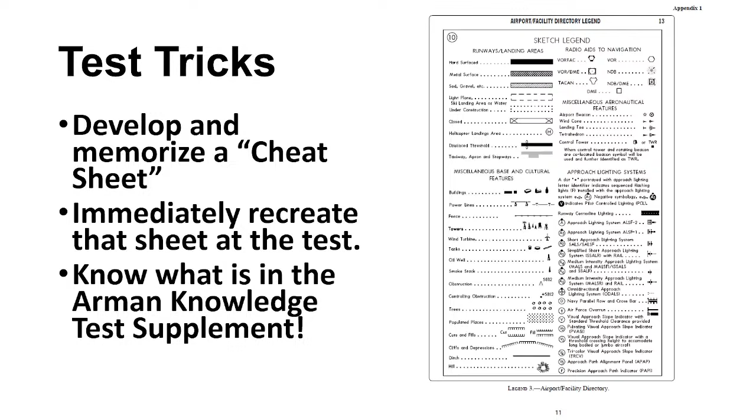In theory, my whole point here in helping you in ground school, I told you my number one goal is getting you through the written test, then getting you through the orals, and then helping you prep for your flight training. So that's what ground school's for. These are test taking techniques that will save you an amazing amount of stress, get you a better score, and make your orals easier because you get a better score.

So, review questions - we gotta do review questions every night. First one, just draw our standard 6-pack plus 2 that we've been using. On this paper? Yep.

So you should at least have something that looks roughly like what I got up there right now. Those of you that have already started labeling, that is coming - working ahead is perfectly fine. The idea is, can you draw it? Can you label the instruments? And then can you do the Rod Machado steps? And finally, can you put what the unit of measure is - not every one of them has a unit of measure, but what the unit of measure is that you get from that device.

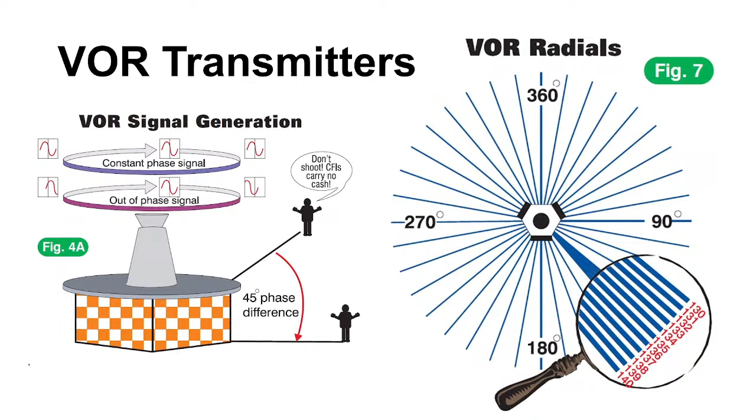Magnetic or true? Magnetic. And there's actually going to be something else that we're going to talk about in here, because I went and did research on something after our little flight.

Alright, so VOR and magnetic azimuth. Oh, look at this slide. Because the magnetic North Pole moves, the VORs have to periodically be updated. Alright? Which is awesome, except they don't all get updated at the same time.

So this specifically is the Ocala, Florida VOR to the Gators VOR. On Victor 441, if you look very, very closely, you are flying on the 355 radial from Ocala, and you're going to come in on the 171 radial to Gators. What is the reciprocal of 171?

351, I actually wrote it up there, right? 351. So in theory it says you went, okay, I'm cruising along, I'm going at 355 degrees, and then I should be going to 351 degrees, but the line doesn't bend. It's straight, because they're updated at different times. Those two VORs are updated at different times. And I literally pulled this off the chart yesterday.

So here's the thing. You are not flying at a magnetic heading of either 355 or 351. You are flying at whatever the magnetic heading is, if you went and drew it on the chart and did all the math today, whatever that is, it's somewhere in that general area, it's going to be close. You are never, ever specifically flying the same magnetic heading as the radial you are on. They're just close, kind of close enough.

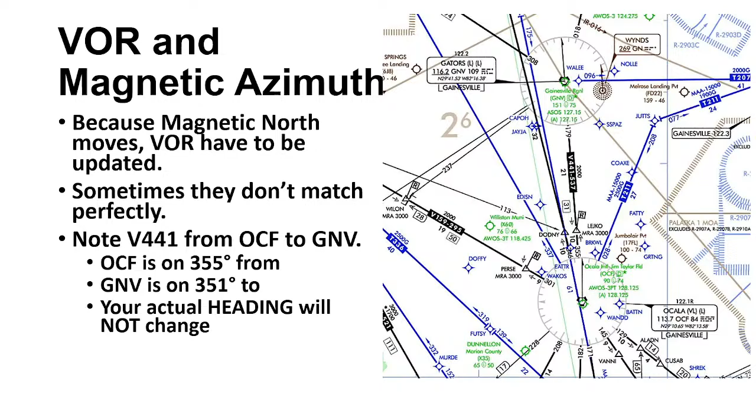And then the Coeur d'Alene one's just right at the field, so if you land on runway 16 and look out your window, you see it as you go by. Okay, so to identify a VOR, to make sure you've got the right one dialed in and you're receiving and that it's working, what do you do?

Listen to Morse code. You have to know Morse code? Because it's written right there. And the Morse code is slow enough that you can just pick it out based off of reading the little dots and dashes. At most, you have to listen for 4 letters.

Do you ever have to listen for 4 letters at a VOR? Yeah. Who said yeah? Why would you have to listen for 4 letters at a VOR? Because you said at most you have to listen for 4 letters. Yeah, I said that, but what I was saying is when you're listening for the Morse code while you're identifying ground-based systems, the most you have to listen for is 4 letters. VOR identifiers are always 3 alpha characters, never numbers, always just 3 letters. So when do you have to listen for a 4th letter?

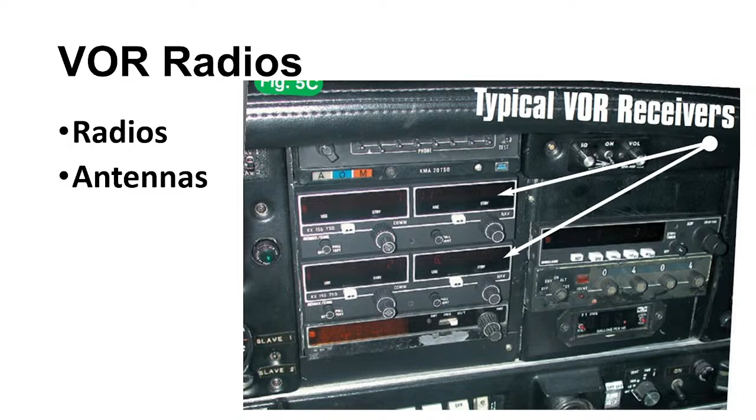This is also a VOR radio, the Garmin 530, the Garmin 430. Now, not all GPS have nav radios built into them, but the typical stack you see with a 430 or a 530, that radio set is actually several radios jammed in there. You've got the GPS receiver, the VOR receiver, the comm receiver, and a glide slope receiver. The glide slope receiver is automatically tuned with the localizer receiver, same knob.

Some DME installations, when you tune in the localizer, automatically tune the DME. Some don't. You may know what DME is? Distance measuring equipment. There we go.

So I throw this up here because people forget that the GPS is also a VOR radio. What changes it from being a VOR, an FM VOR radio, to being a GPS receiver, functionally? It has a GPS antenna and can interpret the signals. No, from an operational perspective.

It's a frequency, right? Not the frequency. There's a CDI button, and when you poke it, it'll either... see where it says GPS above CDI right now? When you poke that button, it'll say LOC, L-O-C, or VLOC. VLOC, VLOC, VLOC. So that's for VOR localizer.

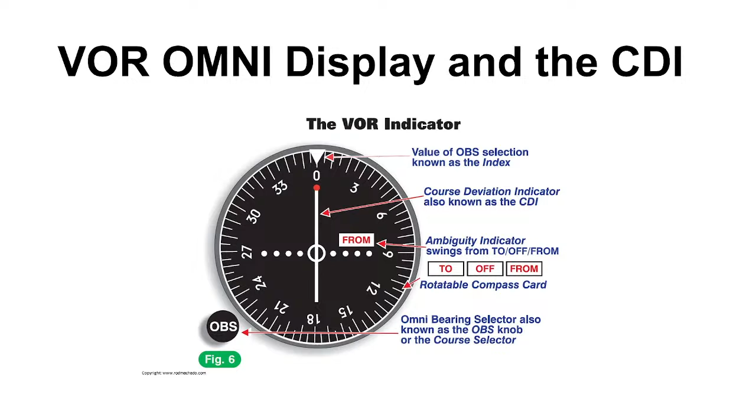I've learned recently that some people refer to that as the donut. The donut represents your aircraft's location in there, and the line of the CDI represents your desired course, if you are in forward sensing mode, if you're in the appropriate mode.

So, navigating with your VOR: VOR needle deflection is how far the little needle is moving—this is VOR speak, or FAA speak. How far you are off course is called your course deviation.

And in GPS, course deviation is also referred to as cross-track error.

Why is it to the left? The airplane is to the left of the course. So the desired course is 360. We are dialed in for the 360 radial from. So we read it at the top. From is at the top.

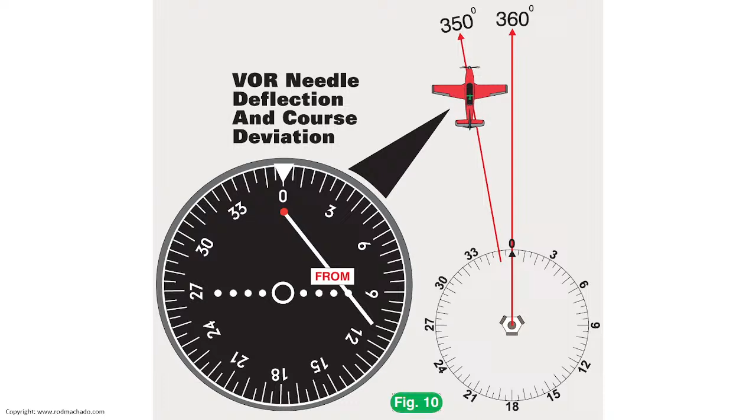So this right here, my dot is to the left, so I am half deflection to the left. If I wanted to get back to the line, what would I do? Fly to the right, I would turn to the right. And as long as you understand that, you're spot on.

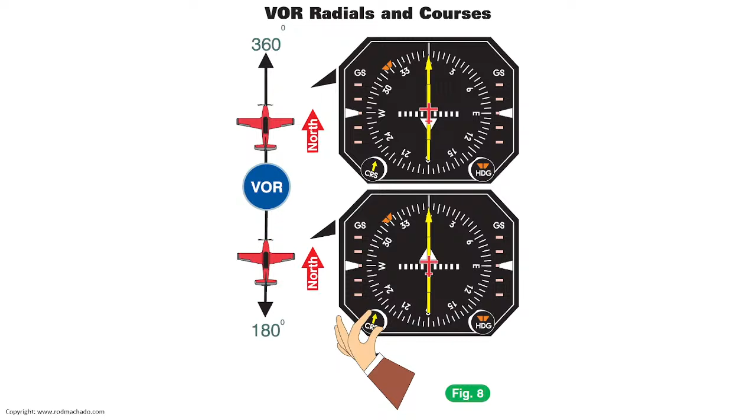180 to, 360 from. In the HSI, the little arrow points away from the radial if you're going the right direction, which, if you were going a weird direction, the HSI would be pointed off to the side. Nicole does have a good trick about that too. I forget what it was. It's okay - if not today, next week we're going to go over tricks and ways to get through the test.

So, selecting your course - remember this, your course is usually the left knob. When you dial that, you are changing the course you are trying to select for the VOR. In EHSIs, if you're on a GPS, that course will automatically change on you if you're cycling. But if you're flying on the VOR, it does not - you have to know it's your job to say, hey, this is the course I want.

It is also a very good idea, once you get established and center your needle and your needle stops drifting, to realize that at some point your course is not going to point the same way that you're actually heading. Heading is which way your plane is pointing. Why would they not line up?

Say it loud - wind! Why are you always whispering, man? I mean, you know I'm just going to tell you to speak up.

Wind. So when you get your wind correction angle set, it's a very good idea to immediately set your heading bug to match your wind correction angle, usually. Use those tools, because then you can see if you're drifting off the intended heading, which is what's keeping you on your desired course, and you can also see if the wind changes dramatically. Because if suddenly you need to change that wind correction, since you're coming off course but holding heading, then you know there's been a change. So use that tool.

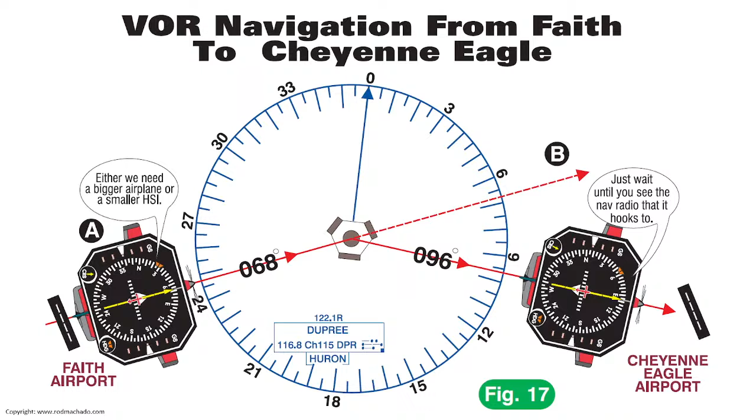I've seen a lot of people that have it right on their panel—they just make a little sticky and stick it up there. There you go. So, dual VOR—what's nice about having two VORs?

Step down fix—what's that? Step down fix, it is a way to identify position. So with a radio, all you know is what direction you are from the VOR. So far, we don't have any tools to tell us where we are on that line. But if you have two VORs...

You can do it with one VOR—it just means a whole lot of tuning and twisting. But you can get on one radio and then look for where that radio crosses the radial from another VOR, and it will tell you exactly where you are in space, because two radials only cross in one place. It's like longitude and latitude, but based off of VOR.

So does anybody have a difficult time with this concept? This is one of those that if you don't get it, it really hurts your brain, but most people kind of get it intuitively—if I know what line I'm on from this radio, and what line I'm on from this one, I know where my intersection is. Two lines make a point.

So it's just a question: instrument procedures that need step down fixes never actually require two VOR radios, right? No, because you can do it with one, but you do want to switch back and forth a lot—it's just a lot of work. It's an incredible amount of work, and you really have to be good at tuning. Now usually you can put them in flip-flop, but then it's setting the OBS, and you better be on the right OBS, you know.

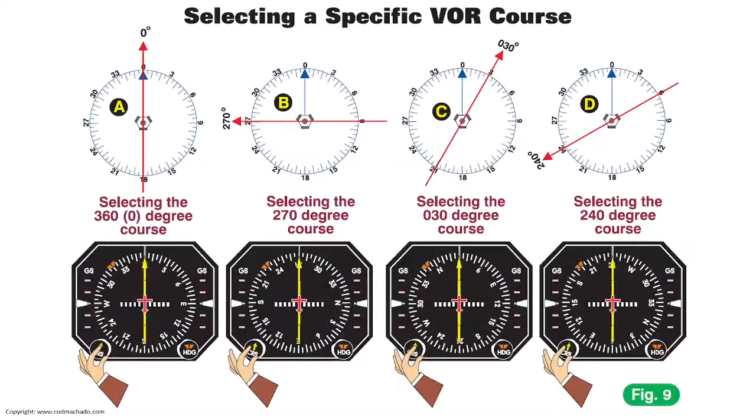I think at 60 miles, 1 degree is 1 mile. So 1 dot is 2 degrees, which makes 1 dot equal 2 miles. So at 60 miles, for every dot, you are 2 miles off course. How wide is a VOR Victor Airway? 4 miles total, I think. So at 1 dot of deflection at 60 miles, you are almost off the airway.

I'm going to double check that, because it might actually be 4 miles each side. Let me check it. Alright, everyone pull out Google. Well, that's what we're here for, to support each other.

But the bottom line is 60 miles, 2 dots. I don't always trust my memory, even though I just researched this. I went back to check my notes: 1 dot is 2 degrees, is 2 miles. It's 1 degree at 1 mile for every degree at 60 nautical miles. So a Victor Airway is 4 nautical miles on either side of the center line, which is 8 nautical miles total. And at 2 dots of deflection, if you're fully deflected, you're off the course at 60 miles.

Aerobatics are prohibited within 4 nautical miles of a Victor Airway, right? Isn't that one of the restrictions on aerobatics? I believe it's measured from the center line, so it's 4 miles from the center line of the Victor Airway, which makes it 8 miles wide total. Yes, that's why I said I was wrong, we were clarifying coming back.

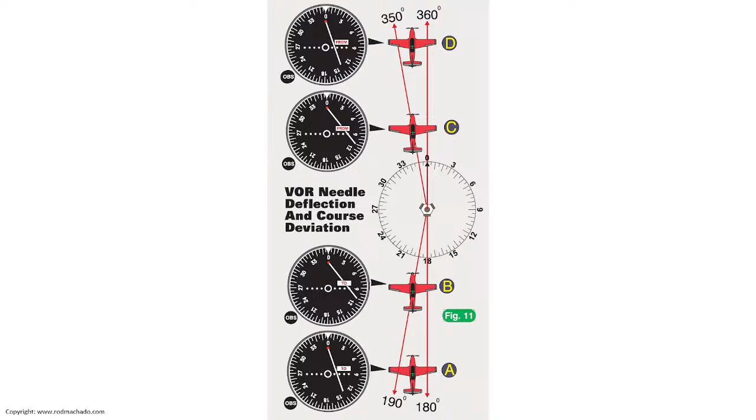I am slightly right of course, get back on course. So if you're less than 120 miles away and less than 2 dots, you know you're in the safe zone. Hypothetically, you should be inside that safe zone if you're less than 120 miles and less than 2 dots. Except your VOR is not going to be receivable at 120 miles actually. So let's not overcomplicate it. The real thing is, if you're deflected, get back on course. Center your needle. Alright, get back to where we were.

So, chasing the needle. I had an image I meant to throw in here and I forgot to do it, about the zone of the cone of confusion we talked about. What's the zone of ambiguity? Does anybody know? Isn't that right over the top, where it doesn't come to or from?

So it's if you don't cross directly over the VOR, right over the top, that's the cone of confusion. It's a cone that goes from the ground up, perpendicular to your radio. So this is my VOR. Where's the cone of confusion? Your cone of confusion looks something like this from the top, centered here.

Now, if I'm supposed to be flying to the VOR but for some reason I fly over here, your course is still down through the middle. You're still going to get that. Bottom line is you are way past full deflection at this point, but right here, your CDI needle doesn't know which way you are past. It knows you are at full deflection, so it may windshield-wiper on you, sometimes pegging to one side and then flipping to the other side. Sometimes your to-from indicator will go into a flag mode for a second or two, it winks out at you for a minute.

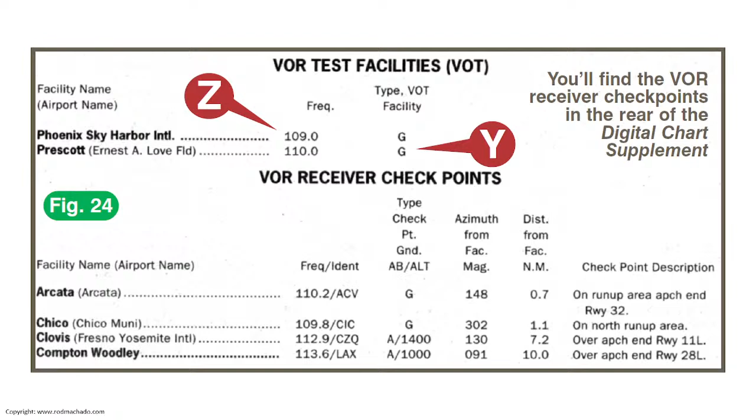So those are ground VOTs. I have never seen an airborne VOT, but now you've got me curious. Somebody mentioned it's plus or minus 6 if you're in the air. I'd have to look, I don't think it is, but it shouldn't be, because the VOT only emits one radial. It doesn't matter where you are from it, it only emits one radial. So if you're airborne, why would it have more than that? I don't know, I'll have to look it up.

And I'm not, we're kind of going behind, so I'm going to speed up. DME. You will likely never see an airplane with a functioning DME anymore. They're out there, they're pretty rare now.

What does DME actually measure? The distance from it to the plane, which is the straight line slant range. And that's what's important. Why is it important that it's slant range? Because of the Pythagoreans. Because of the Pythagoreans? Yeah, excellent answer, very good.

There's not snakes. Because for every 6,000 feet you're up in the air, when you go to the top of it, that's a mile away when you're straight up. So at a distance, it's pretty accurate. As you get closer, the error increases for what your actual distance is from that.

The thing to bear in mind is all of those elongated D's that you see, how they show slant DME distance - an elongated D with a number written inside it. Those distances are the actual slant range distance, and not the distance across the ground. This becomes a problem if you try to compare them using GPS distances or distances that you measure on a chart, because again, your altitude affects it.

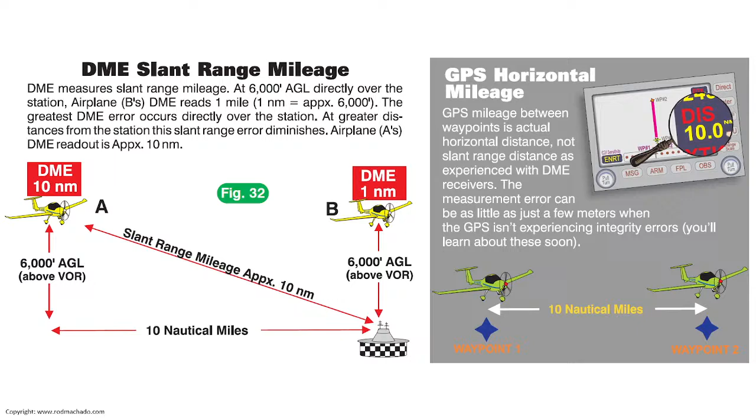Slant range, it's the hypotenuse. It is not the 10 nautical miles on the bottom. Slant range distance is going to be 10 point something miles. Weird exception to that: when you're flying a DME arc and using GPS in lieu of the DME, it's actually measuring the straight line distance to where the DME would be. You're still within the protected zone.

All right, 3 different ways of determining a position with DME equipment. You will never ever do this, but it's just a curious thing coming back to your head. You can be on the line and measure DME distance, and that gives you a specific spot. I am on the 360 radial, 200 miles away.

You can use one DME and a different VOR, and where that DME line crosses is a specific point in space. I have never, ever seen somebody use that as a useful means of measurement. I'm not saying it's not possible, I'm saying it's a pain because you actually have to tune your DME to a different radio than your VOR is tuned to. And then the last one is, if you have 2 DMEs, or you can switch real fast, there are 2 points in space that are the same distance from both DMEs.

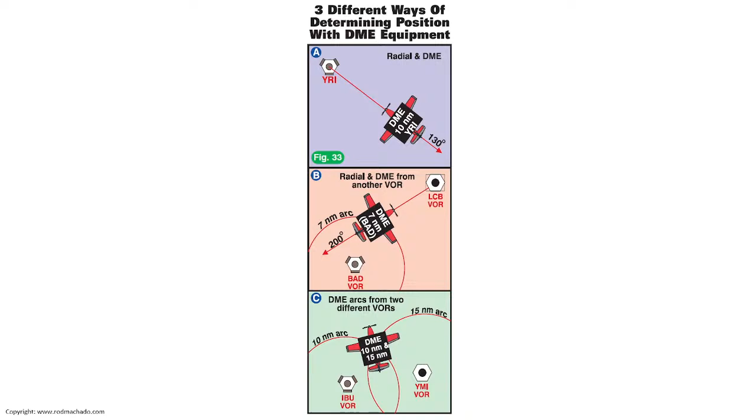This is more trivia than anything else. I've used method A quite a bit - going from the same VOR DME and getting a radial and a distance, super useful, very helpful. My airplane has a working DME still, I love it, I keep killing it now that I named it George. But for B or C, you have to know close enough to where you are to figure out which of those 2 points it might be. So if you're really lost, it's not going to help you.

So, DME arc. You will fly a DME arc at some point in your training, it's just the way it is. Your instructor is going to explain it to you a lot because it's one of those things that's like trying to explain to somebody how to play a piano for the first time. Except it takes a lot less effort to actually make it work. And then once you figure it out, it's kind of like riding a bicycle.

You're going to learn this whole thing about turn 10, twist 10. I don't use turn 10, twist 10, I use half deflection, half deflection. You twist the OBS until you have half a deflection. Then you fly, you cross through, you let it go to half a deflection, and you turn it until you got a half a deflection again, which is turn 10, twist 10. It's just a variant.

This is what a DME arc looks like on a chart. We haven't taught charts yet. But the bottom line is your course is a big curve, and it helps keep you from having to do weird turns and weird things to get on line. All right, turn 10, twist 10, DME arcs made easy.

I have not done... Hi, it's Dan with Flight Insight, and we're looking at the DME arc here. I don't know if we're going to get audio on this.

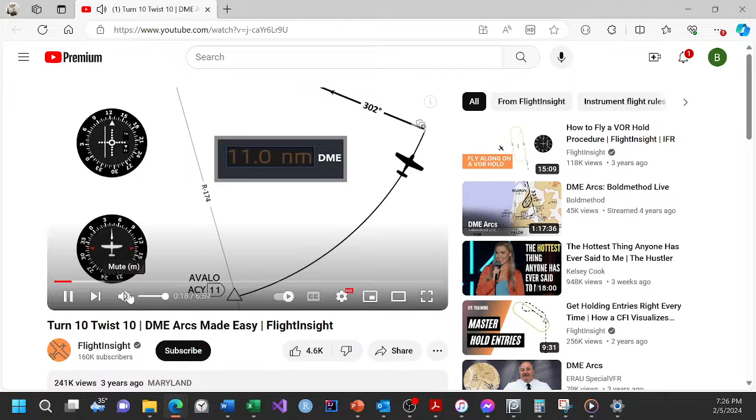How many G's was that?

More than you'd like to know. One to enter and one to leave the arc, then a series of small 10-degree turns to stay on the arc at a constant distance from the station. Okay, this is not going to work.

Let's look at the VOR approach to runway 31 in Atlantic City. You see the two arcs to the north and south of the approach course, and the big note saying DME is required. Let's focus on the southern arc, which takes us just along the coastline, clear of all those casino high-rises on the boardwalk.

As always, we'll rebuild this approach on our whiteboard, starting with the VOR station itself, located right on the field, and then move the procedure over to the left for now.

We can get set up for the arc by flying outbound from the station on the 174 radial. The DME arc starts 11 nautical miles from the station at a point identified as Avalo. It's noted by the triangle and the number 11, inside that elongated D for DME.

From Avalo, we'll arc to the north and east, staying 11 miles away from the Atlantic City VOR the whole time, until we reach the inbound course for the approach of 302 heading. Just note this isn't the 302 radial, but the reciprocal of that — it's the 122 radial. In any case, we're flying the 302 heading that will align us with runway 31.

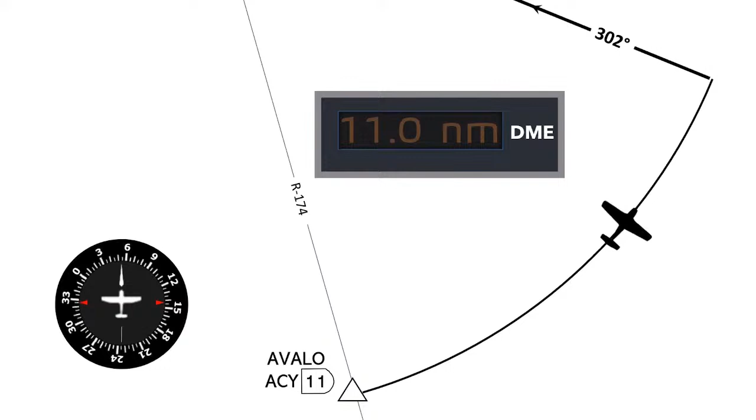Let's get a closer look at the arc. From the time we depart Avalo, we'll be making heading changes to the left in order to stay 11 miles from the station. Our DME receiver, or the distance measured on your GPS, will help confirm that we're staying on the arc. It's all too easy to veer away from the arc by, for example, not turning enough so the aircraft drifts further away from the station as the DME shows.

So we need some way to tell us when to turn. This is where the VOR receiver comes in. We can identify a series of radials from the station that will tell us exactly where we are on the arc. So just like Avalo is on the 174 radial, we can mark other positions on, say, every 10th radial from there — like the 164, 154, 144 radial, and so on.

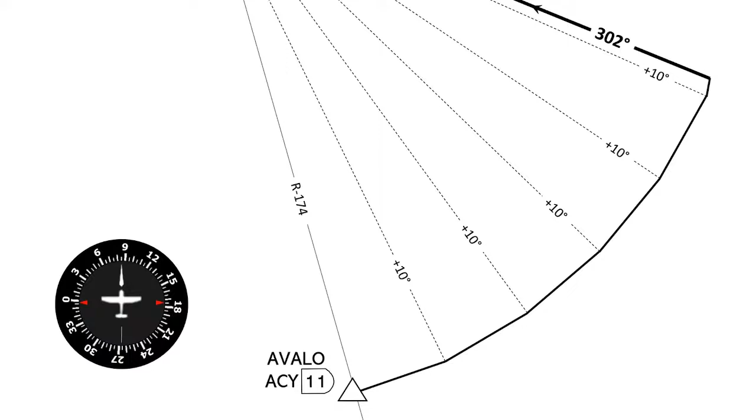Then instead of thinking of the arc as one continuous left turn, we can split it up into segments, each with a 10-degree turn at a time, starting at the radials we identified. So we turn the arc from a perfect circle into a portion of a sort of 36-sided polygon.

Now we'll get set up by intercepting the 174 radial outbound. We've got 174 selected on the VOR and are flying an intercept heading of about 145 degrees. When the needle centers, we'll turn to the outbound course of 174, and we know we're approaching Avalo when the DME gets closer to 11.

From Avalo, we'll make a 90-degree turn to start the arc. The arc starts and ends with 90-degree turns, but you don't have to do the math. Pilots should never do hard math — even smart pilots lose about 30 IQ points in the cockpit. Just too much going on.

To figure out what a 90-degree left turn is, just look at the left red arrow on the heading indicator, which would be 84 degrees, and fly that.

Now we're ready to start flying the arc, but we want to know when it's time for the next left turn. We'll want to turn again when we cross the next radial 10 degrees away, so we'll twist 10 degrees in the VOR, sending the needle to the left. Which way do we twist? Well, we're arcing with turns to the left, so the numbers decrease, just like in any left turn. If we were arcing right, we'd increase the radials.

Now we'll fly our heading until we cross that next radial as indicated by the needle coming to the center. When that happens, we'll turn 10 degrees left and twist 10 degrees left, continuing to fly on that new heading. Once the needle centers again, it's another round of turn 10, twist 10, and flying the next segment.

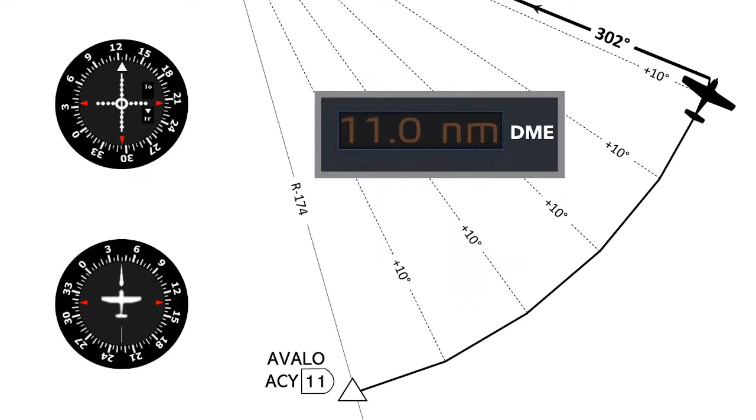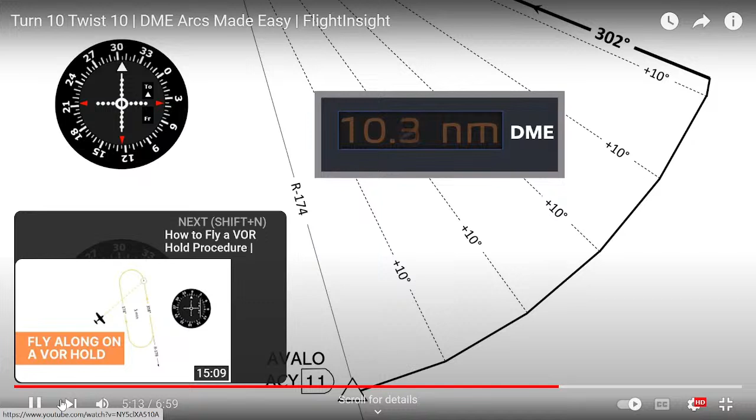Remember, our inbound course is 302, so we'll want to enter the approach segment when 302 is on the bottom of the VOR receiver. Again, it's not the 302 radial we're flying, it's its reciprocal. Now it's time for the second 90-degree turn to exit the arc and enter the final approach course. We'll turn inbound and then twist the VOR so the inbound course is now on top. Notice the flag flips from FROM to TO, and from there we fly inbound like we would on any VOR approach, noticing the DME distance getting smaller as we approach.

That was better than me trying to explain that. Some pretty good visual aids. Yeah, like that one. All right.

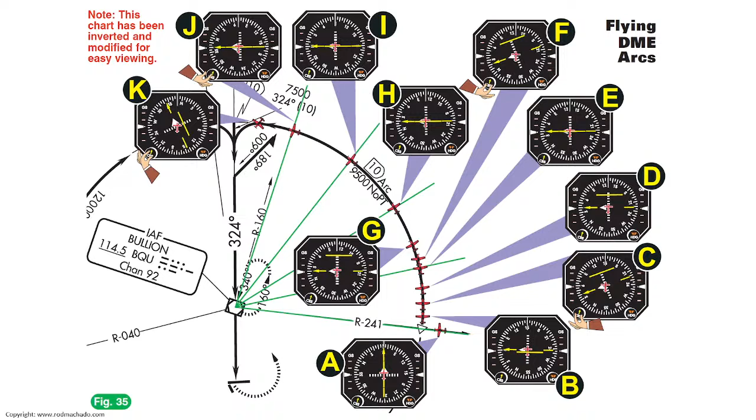Alright, I throw this up here because this is the picture from the book. The YouTube video was much easier to understand. Flying a DME arc is harder to explain than it is to do, but doing it takes practice. It took me like 20 minutes staring at this, and finally I drew it out before I actually figured it out. There you go. Okay.

So, using the RMI. Again, it's another one of those - you're not going to see an RMI, but you might see a question about an RMI. The RMI needle just points to the station all the time, kind of like an NDB. So you have to do this weird convoluted math if you want to figure out actual courses and reciprocals, which is hard. But for flying the arc, as long as you keep the same DME and you keep the RMI needle pointing to the proper side of the plane - if you're doing the left arc, it points off to the left wing - you just keep it pointing at the left wing and periodically make a little 5 or 10 degree turn, and it will stay off to the left wing. Just make sure if you're getting further out, you turn closer towards it. If you're getting closer to the DME, you make a shallower turn, or you just stay straight for a little while. You'll catch back up to the arc.

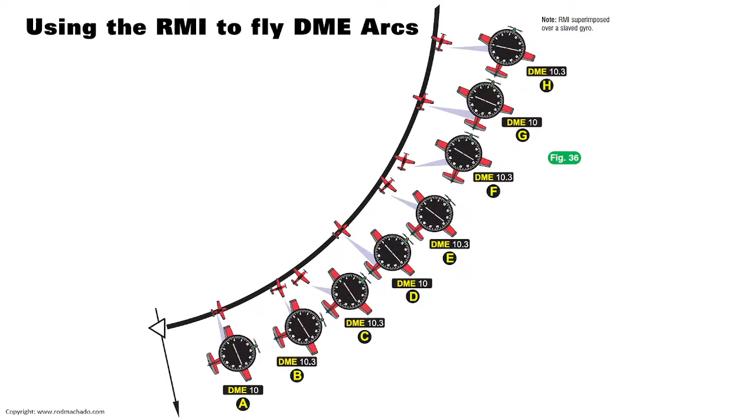VOR and the ILS. Yeah, ended up way longer than I was expecting. All right, VOR and the ILS. Same radio. Localizer is usually located on the field, and is usually aligned with the runway. Localizer only has one true radial with an associated back course. The ILS also has a glide slope, which is basically a radial turned 90 degrees on its edge. Okay?

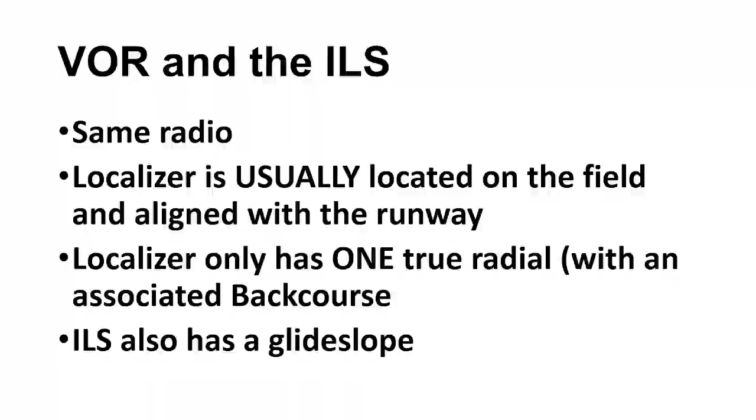Localizer compared to a VOR, you've got - there's your 20 degree VOR course width, 10 degrees left or right. Okay, but elsewhere it actually says it's only 10 degrees, so I will double check why I have two different widths. This is out of the book, so stick with 20. I have never been asked that as a test question, just so you know. I don't plan on being asked it as a test question. It's more thinking for navigation, if I'm doing something stupid like trying to use two VORs to triangulate my position.

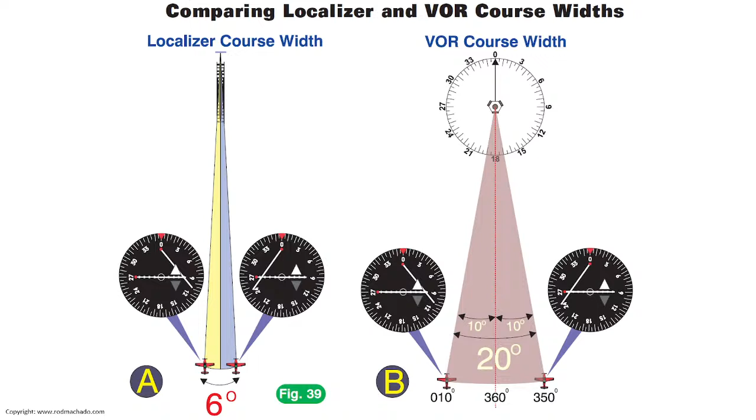Hopefully what you're getting is the center of the VOR. Okay, so a normal localizer is 6 degrees wide. Some are only 3 degrees wide. Depends on how wide the runway is and where the localizer is placed, because the goal is to make it so that when you cross the threshold, there's a certain width - it's 700 and some feet. I think it's just 700. Is it just 700? I think that's what it says in here. Okay, see, you guys remember better than I do.

Notice, this picture with all kinds of information is on page 47 of the knowledge testing supplement. Yep, 700 feet. Long runway, 3 degrees. Short runway, 6 degrees. Also that you end up with 700 feet in width.

All right, the back course is going to be reverse sensing. Sometimes they have approaches that use the back course. If you're on a back course approach, the glide slope is void - do not pay attention to a glide slope on a back course. So why would we use a back course?

Because the wind is going the wrong way for you, and it allows you a straight-in landing.

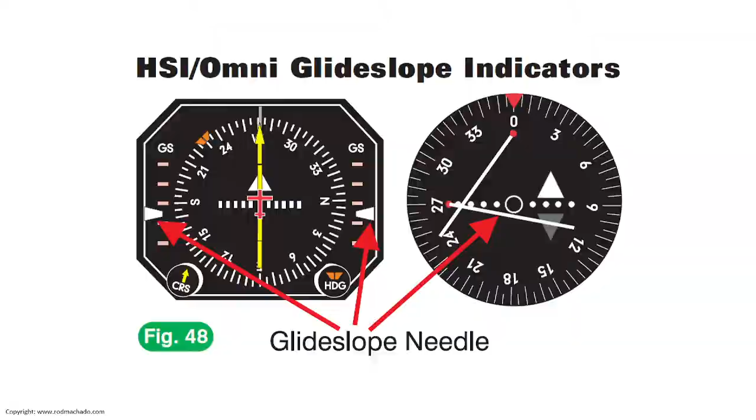So if you're on a back course, will that glide slope still be there? It shouldn't, but sometimes they will show up. If you are on a back course, you are guaranteed that glide slope is a false glide slope. It'll only show up on a back course through weird reflection or some sort of building in the way. Craziness.

All right, glide slope indicators. The glide slope, if it's above your little donut, you're below the glide slope. So you should hold your altitude and wait till you come into it, and that is the proper way to intercept a glide slope. You should always come into a glide slope from the bottom. Why do we not come in from the top? Anybody know? Because you're descending very quickly if you get it that way.

So if you are too high on the glide slope, there's a true glide slope, and then there's like some ambiguity space, and then there'll be a false glide slope that'll be much steeper than the proper glide slope. It has to do with harmonic resonances and wavelength interference and math, but you can have up to two or three false glide slopes depending on the installation. The trick is the bottom one is the right one, and if you come into it from the bottom, you'll get the one that comes in at the lowest angle. That's the one that's been surveyed. Otherwise, what you end up with is too fast a descent rate, too steep an angle.

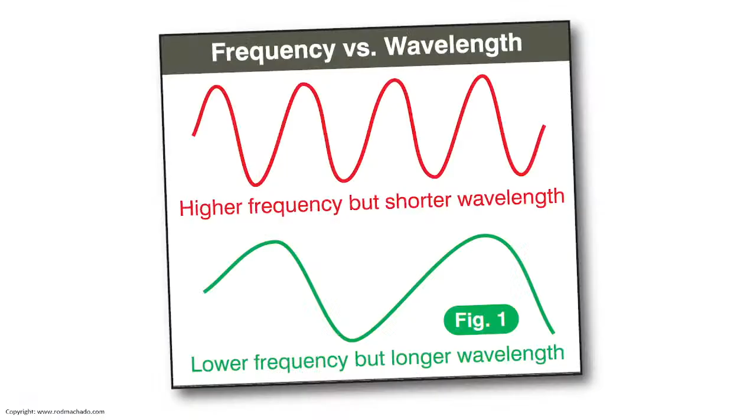Here's a question for you. What do you do if you're somewhere, say that you've got to go missed approach, quite a ways out, and you accidentally get on that higher false glide slope? You realize you're on it, but you're already past your missed approach threshold. What do you do? You go missed. You're gonna do a missed approach and go around. But even if you're already past where you can do a missed approach, you're still over the airport. You will go missed. If you are not on the proper glide slope, you go missed.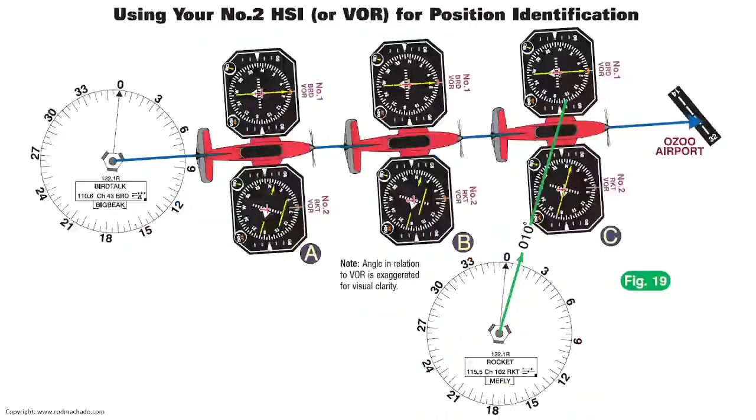Oh yes, technology. It's beautiful.

Glide slope: outer marker, middle marker. There's technically an inner marker too, but you'll never deal with it. They're just little radios that broadcast straight up, making a little oval shape that tells you where you are on the glide slope. You'll only see them on an ILS, instrument landing system.

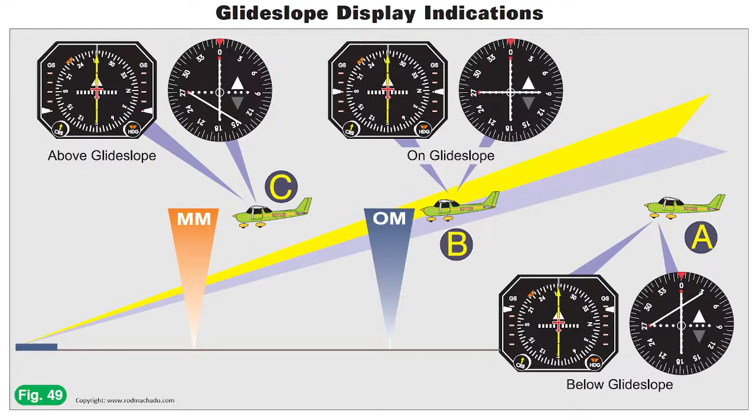Your glide slope transmitter is usually just off to the side of the runway, partway down it. Big thing to note: the glide path brings you down to the 1,000 foot markers - that's where it's trying to put you down, not at the end of the runway.

Your touchdown zone is in the first 3,000 feet of a runway. The touchdown zone identifier is the big 1,000 foot markers - I call them the refrigerators. You land on the refrigerators. That is the proper way to come down.

Your antennas are typically on the back of your tail, oftentimes looking like gigantic cat whiskers. It's not necessarily true that your glide slope antenna is in that same array, because the glide slope antennas are super short, while your VOR antennas are longer.

Those radios you were talking about - what does that look like in the cockpit when you go over one? The marker radio lights up.

They're very often 3 little colored lights built into your commo panel. You find weird places that there's just a radio built in. If you've got 3 little lights - a blue one, an orange one, and a white one - that's OMI: outer, middle, inner. There will also often be a little marker switch for low and high setting.

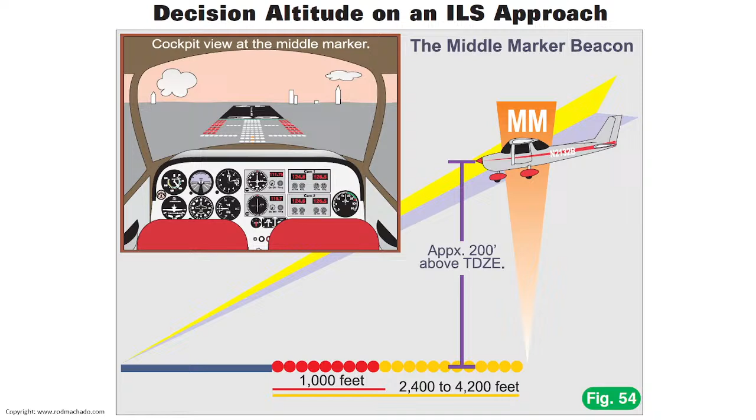The outer marker beacon is 4 to 7 miles out. It's not nearly as precise. It will always be on the glide slope and will be indicated on the approach chart. Nowadays it usually also has a co-located GPS fix. It's not technically a step down fix since you're flying on a glide slope, but it is just a reference to where you are.

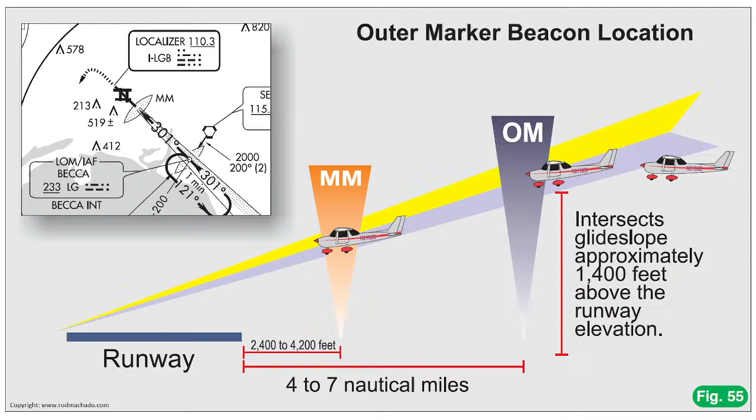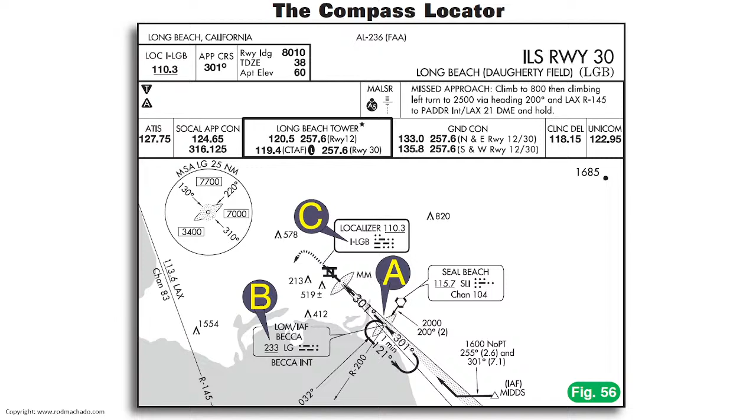And compass locator - a compass locator is a marker beacon that also acts as an NDB. They're being phased out, but there may be a test question asking what a compass locator is: a marker beacon that also functions as a non-directional beacon.

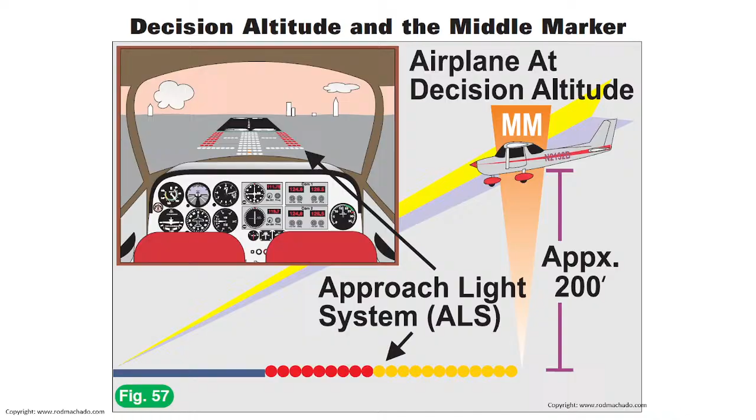Inside the middle marker - decision altitude. Approach lighting systems: for tonight, all you need to know is there's a bunch of different lighting systems and they look different. There are little pictures that depict what they should look like, and those end up on your approach plate. This was in this chapter, so I threw it on here now. We'll talk about it more when we discuss approach plates.

You want to know what kind of lights you expect to see. You also need to know that when you reach your decision altitude or MDA, you have to see something on the runway side of the lights, in addition to the lead-in lights, to continue your approach beyond 100 feet AGL. That's kind of a big thing - you're doing it within 100 feet of the runway without being able to see the runway.

You can only go down to MDA or DA, and then if you see the light out here, you can continue down to 100 feet. Your MDA might be 600 feet, it might be 400 feet. Very often on an ILS, it's 200 feet.

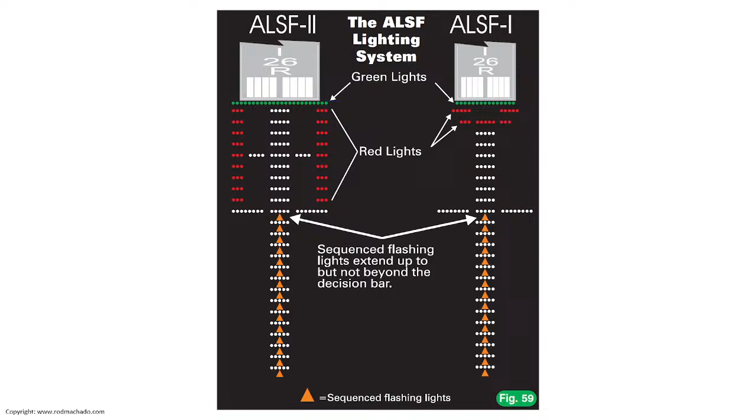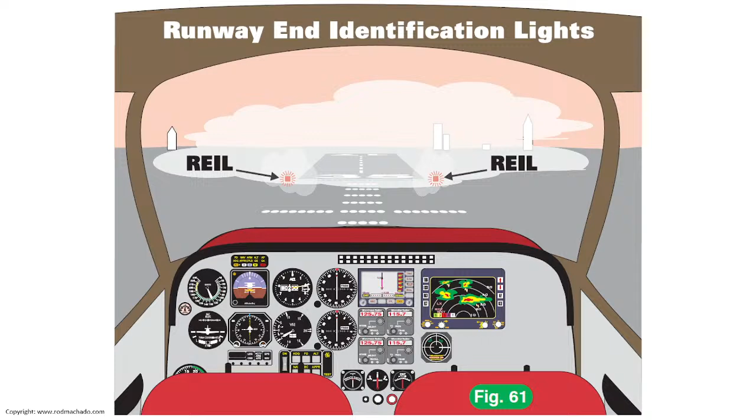ODALs are very, very simple lights. They're all white, but they flash in sequence.

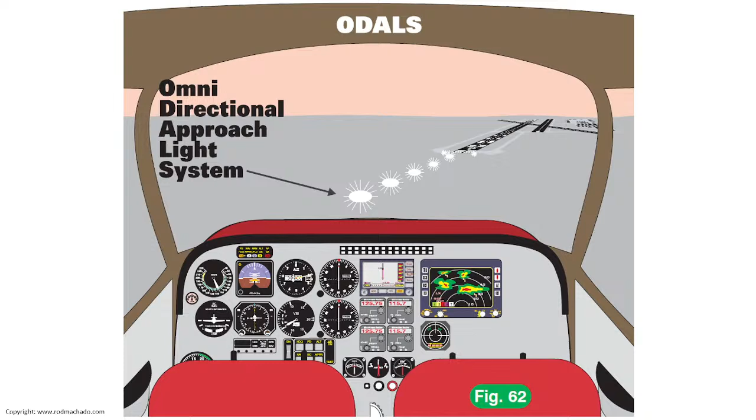So this is a little bit of potpourri at the end here. Simplified directional facility may or may not be aligned with the runway, maybe 6 or 12, and it has a 3-letter identifier, will not have an I. An SDF, those are all being phased out. You could stumble across one for a little while longer. It's like a localizer, but not as narrow necessarily. It's very often not exactly aligned with the runway, because there are obstacles or other things that cause a problem with using a regular localizer. So it's a workaround. They usually have much higher approach minimums than localizers.

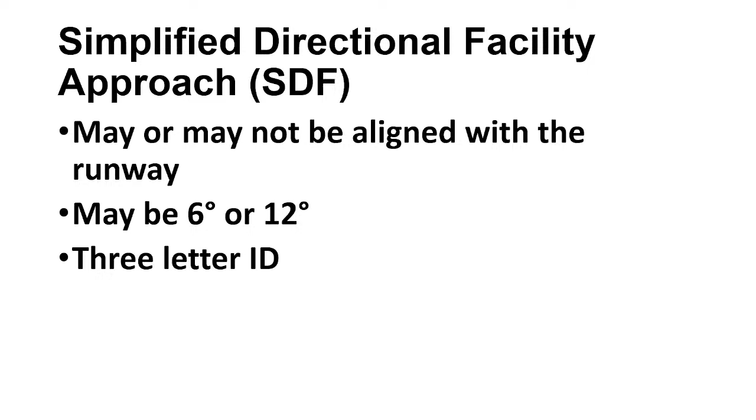Again, said obstacles. Because you have obstacles in the way. And it ends up with, oftentimes you'll have a weird descent that's a little steeper than normal. This SDF is 6 or 12 normally, so like I said, they can be 6 degrees just like a localizer. But if they are 6 degrees, they're probably not aligned with the runway.

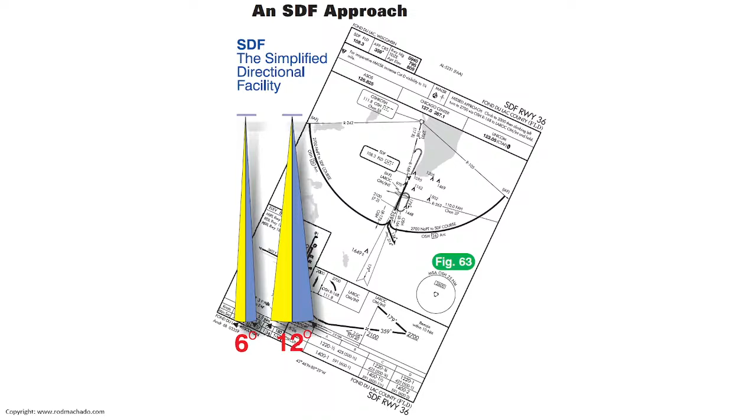Then there's localizer type directional aid. This is when you use somebody else's localizer to do business at your airport. So if you've got 2 airports that are pretty close together, one of them has a localizer, the other airport may just not buy one, and they'll use that signal. It's important to know you're coming down on an LDA, because if you keep following that thing, you're going to end up at the wrong airport, not just the wrong place. LDAs are almost always circling only minimums, but not always. If the localizer happens to go down the runway and is within 30 degrees, they can use it for straight in minimums.

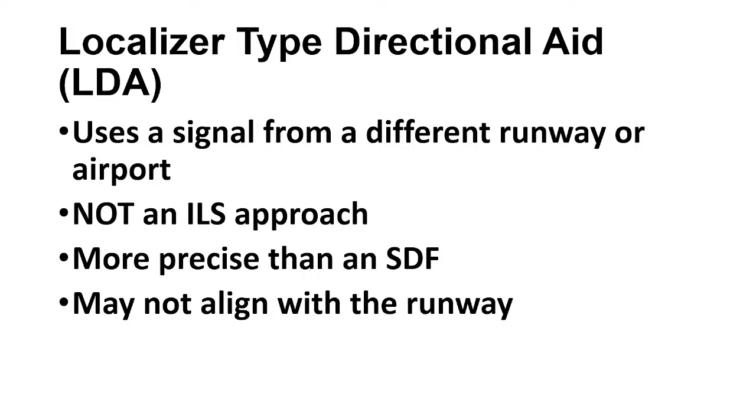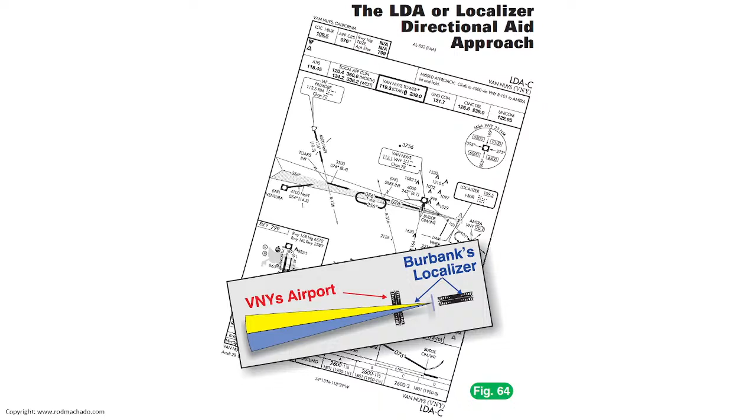Burbank, and then Van Nuys has a runway. So if you think about this, at Van Nuys, you come in flying down Burbank's localizer, and then you're going to have to circle either left or right to land. If you kept going straight, you'd be landing at Burbank, and they might be upset with you because you're not supposed to be there.

There you go. All right, area navigation, I want to hit this piece real quick. There is a form of RNAV that was based off of VORs, called VOR DME. Remember how you can calculate your exact position in space from the radial and distance from the VOR? They made a box, a computer in your plane, where you could say I want to fly to a point on this radial, this far from this VOR, and it would make that point and treat it like a fake VOR. I bring this up because I think there was one question on the test about it.

But what's important is that you understand RNAV does not equal GPS. GPS is one subset of RNAV. It's also called GNSS, and I knew what that stood for 2 minutes ago and now I forgot. Global Navigation Satellite System, thank you very much. So GPS operates on the GNSS. GPS is one form of RNAV.

There used to be a form called LORAN, which was super complicated because it used radios that sent out ellipses, egg-shaped, with complex calculations. But VOR DME navigation is still performed by certain airlines and military organizations, specifically above 24,000 feet. Which is why on the grab card, the second D is DME or GPS, because above 24,000 feet you're required to have one or the other, no options. You have to have DME or GPS above 24,000 feet.

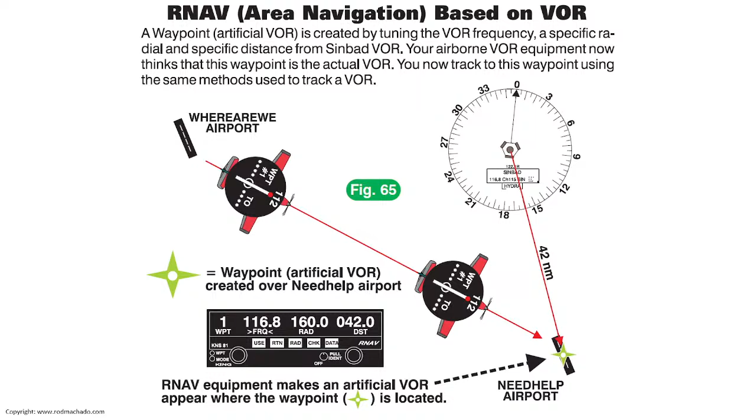All right, so again, it's like you make up a fake VOR and then they fly to and from the VOR just like a VOR.

GPS has 3 segments, and I'm only going to do part of this tonight, I've got time next week for it. So GPS has 3 segments: space, control, and user. Space is all the stuff that's up in space. Control are ground elements that support the space-based elements. And then user is you and your radio.

One thing to bear in mind is that you are receive only. You don't do any broadcasting in the GPS world.

Calculations are based on time and trilateration, which is literally they measure how far you are from multiple satellites, and then that calculates the interceptions of all those spheres, and where they all come together is where you are. The more satellites you can see, the more accurate this process is. It takes a minimum of 4.

The book says there are 32 operational satellites. According to the GPS satellite website, there's only 31 operational right now. But only 24 are required. A minimum of 4 are visible for 3D navigation. Typically we actually use 5. You can only use 4 if you have barometrically adjusted altitude, which is what we have in our airplanes. But typically you're getting 5. Extra satellites improve performance, more than 24 are usually running at any given time.

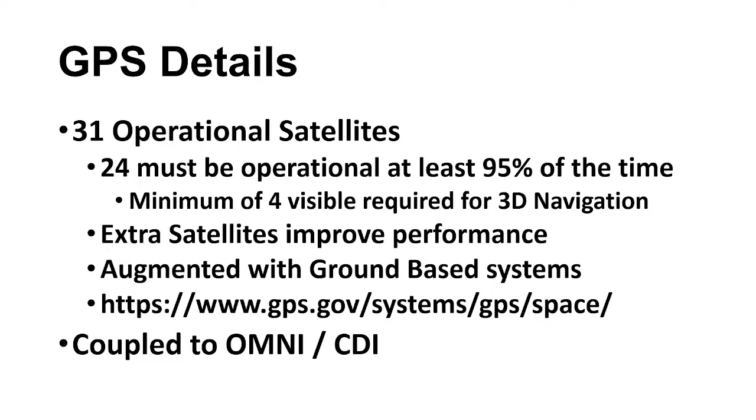Bottom line, at least 24 satellites flying in, and I believe it's 6 orbits, don't quote me on that one. Some people think they are geosynchronous satellites. They are not, they orbit twice a day. So you got new satellites coming in and satellites dropping off all the time.

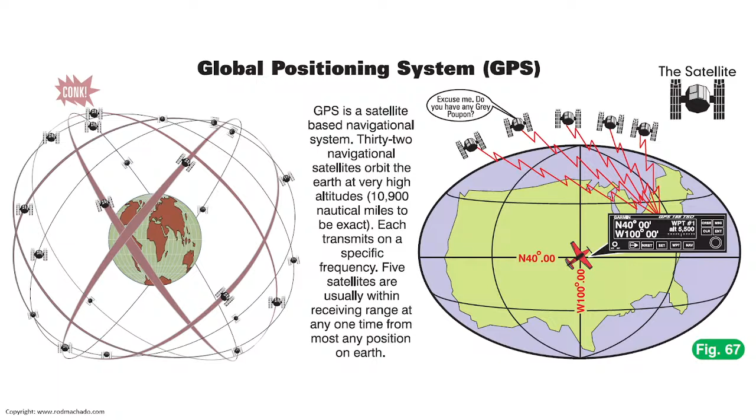All right, so there are waypoints. Anybody here who has not used a GPS in a plane? Okay, good, so you can go pretty quick on this.

Airports, nav aids, GPS only. So what I was getting at here is there are waypoints in the database for every airport out there, in theory. Sometimes you will jump in a plane to go to some obscure airport and it won't have that in the database. An example was Whiskey November 5-4, which is where I actually live, was not in the Jeppesen database, even though we're a charted airport. It has to do with it being private. So I had to call and get them to add it to the database. It's now in the database.

Then you have GPS-only waypoints. These are usually 5 characters, typically pronounceable as words, sort of, sometimes you got to stretch that. There are, however, a whole bunch of them specifically built for visual references, and they all start with VP and then 3 letters. Those cannot be used for navigation under IFR, because you can't pronounce them, but they're specifically for visual flight support.

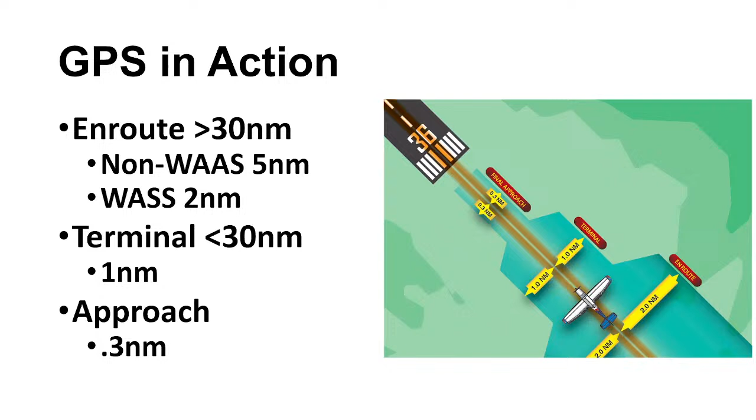The reason this is important is you need to know that your needle may suddenly jump. If you have a half course deflection and you go from en route to terminal, you suddenly have a full course deflection. That's why you want to keep your needle centered.